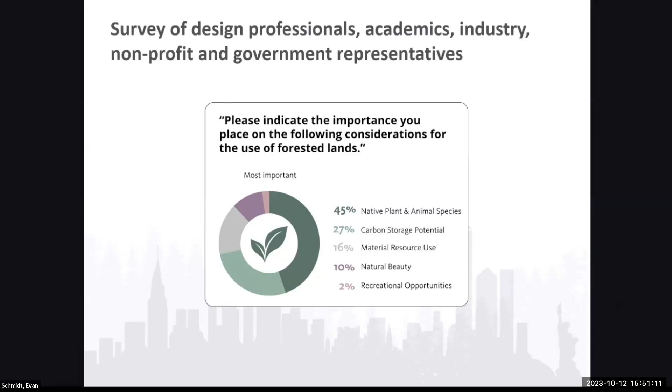We could have speakers from around the world come talk and frame these workshops based on this document. You can find these workshops on our website, buildhealth.uoregon.edu, also on the NetZED Lab website. And the final document, which I'd like to announce is now ready for you to take a look at, it's out there, also on our website. I assume it's going to be on the Tallwood website soon if it isn't already.

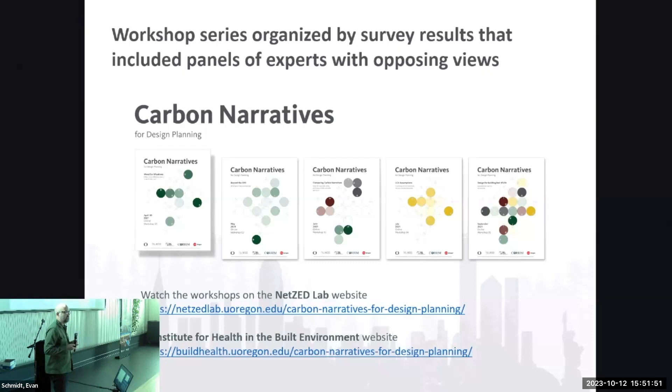So please check it out, we'd love for you to take a look. It's like 100 and some pages, so all the transcripts from the workshops are in there, as well as a breakdown on these different structural materials. It's done in a visual way that we hope architects can appreciate as well as others. It's already been rolled out in classes, so it's really exciting to have this project that Tallwood and the ARS grant funded.

So some important takeaways for this project - like I said, I could go on quite a while, it's a long document, we learned a lot, it was an amazing journey. When we started this journey, we did it along with a lot of you in the room, and you've all been working on this and produced some amazing work based on the lessons we're all learning about LCA and forestry. So this is by no means our work - this is everybody's work that we've compiled based on literature reviews and workshops with experts.

So one of the takeaways is that buildings really are a big source of CO2 emissions, and I think most of us here can recognize that, we're all in the industry. But the global building stock is really burgeoning. We are increasing buildings at a tremendous rate, and it's expected to double by 2060. That's equal to about one New York City amount of floor area every day in terms of built environment expansion. So we have a big role to play as professionals in this industry to help reduce that CO2 emissions from the materials that we select.

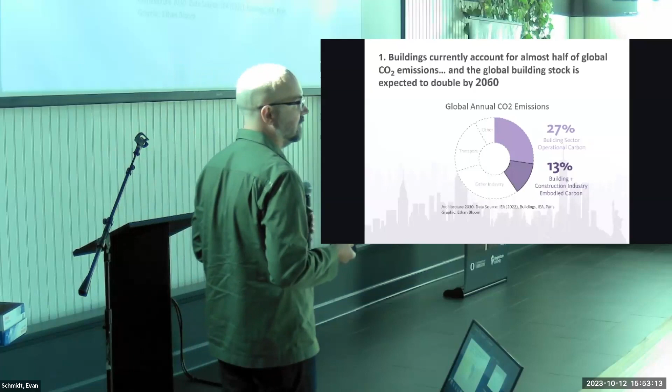The mass timber carbon story, as has been mentioned in presentations earlier today, begins with design and the selection of materials, but also the end of life and material reuse portion of this is really important. That's why there's more effort right now going into that research, because what we do at the end of life with our materials really matters in terms of the carbon story. Designing for disassembly and reuse, and how we get those materials into the market, is still a work in progress in terms of research and certainty. But we hope that with other funded projects, we're going to know more soon. That's an important part of the story.

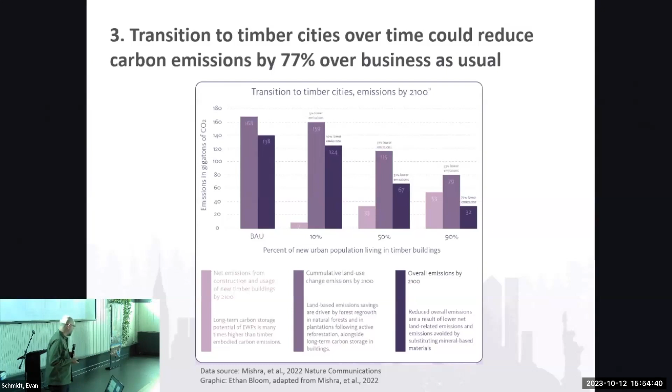Transitioning to timber cities over time could reduce our carbon emissions by about 77% over business as usual, depending on the percentage of wood that we're using. That was a paper that came out in 2022 from Mishra et al., and that was an interesting finding. But of course, it really depends on us managing those forests appropriately, doing good sustainable forestry practices, and protecting diversity hotspots around the world. So there are some caveats to that, but it's a good finding that this can be a good solution for our carbon emissions.

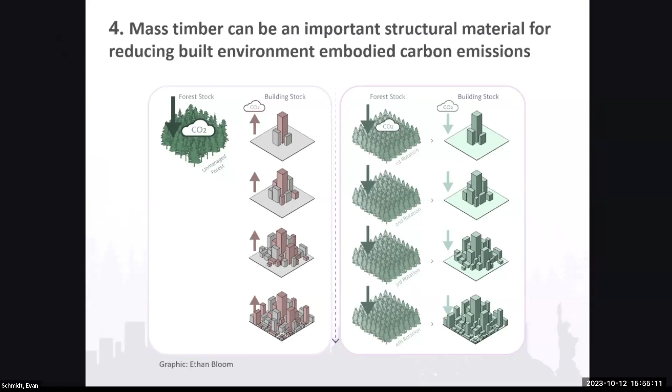This is a graphic - I hope you can see these. I guess they're a little washed out here, but Ethan Bloom did these, and they're beautiful to look at in our document. This is just talking about how mass timber can be important as a structural material for reducing built environment carbon emissions, as we start to move that carbon pool into the built environment, and building durable buildings that last a long time. That's also really an important key to maintaining it in the built environment.

Mass timber can be sustainable, if forest management is sustainable. One of the things that we learned too is just really trying to use the entire harvested stem fiber for long-lived products, not just things like paper that might be short-lived, but really getting the mill waste, for instance, that happens when we make these products, into other products that can be stored in the built environment for much longer periods of time to lock up that carbon.

So that is the project. There's a lot more to it, and this is just an overview, but it's a document that I hope you can all dig into. Maybe with a glass of Pinot Noir, sit down and read it this weekend or something. It's done and it's out there and ready for you to look at.

Another project that we're getting ready to launch - this one was funded this year by ARS, and I'm really excited about it. We don't yet have the contract signed at University of Oregon, so we haven't started, but it's coming very soon - is the infiltration of all wood construction techniques.

As we just talked about, it's important to build our cities more out of timber to get carbon out of the air. And as we want to do that, where do we put more wood fiber? Well, the enclosure is one area which is relatively untapped in this country anyway. In Europe, they've done some more projects with wood in the enclosure, but we really want to start to see projects where mass timber is going into those systems as well.

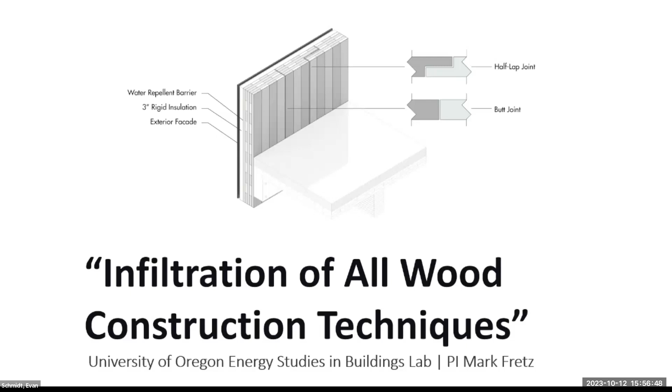We had the opportunity with a Wood Innovations grant to look at that on a beautiful project that's constructed, and do a post-occupancy evaluation of the interior environment with all wood construction. So we looked at a number of things, but in particular, we were interested in the thermal aspects of that enclosure, especially since wood is a fairly good insulating material, and mass timber, the thickness, we suspected could play a pretty good role in being a thermal barrier for the cladding attachments and everything on the exterior. So this project used infrared imaging to look at the enclosure, as well as blower door testing to look at infiltration, and then also imaging during the blower door tests.

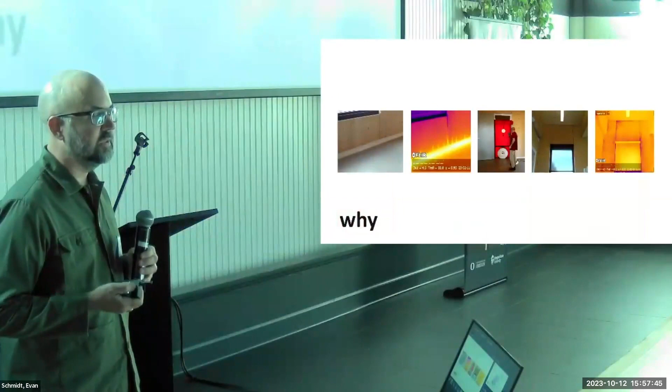One big problem we had when we go out in the field and do these tests is there are all kinds of other variables in the building when you start to pressurize and depressurize them that were not able to allow us to answer the question about how the mass timber panel joints were working for infiltration.

There was a big roll-up door, for instance, and some other offices that couldn't be closed. So we tried to tape off an area where we could assess that. We tried to figure out a way where we could isolate a joint and just test a panel field area, but it's not easy to do.

And so we got some good data from the infrared images that suggested the mass timber was a pretty good thermal barrier, but some of the weaker spots were at the joints for infiltration.

So we suggested that it would be really great to study this in a lab setting and create an assembly where we could specifically isolate joints and look at joint configuration with a duct blaster in a sealed box configuration.

So that's what we plan to do, an 8 by 8 foot field area with several mass timber panel joint configurations, which you probably can't see here, but we're going to be looking at 3-lam CLT as well as 4-inch MPP.

And I know the project we looked at had some thicker wall assemblies. This is because we don't have an overhead crane at the University of Oregon. We have our backs that have to lift this stuff. So they're going to be a little thinner than what we tested.

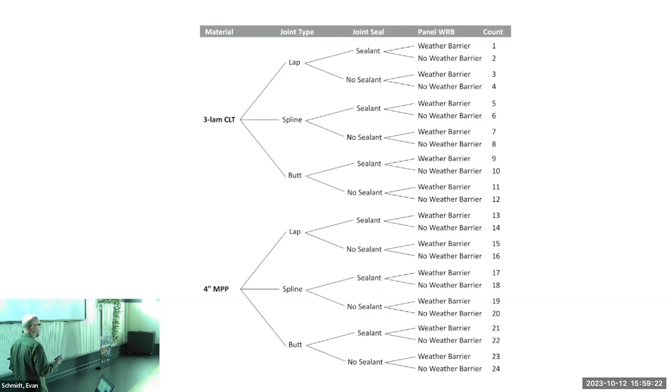But the key is that we're going to be looking at a lap joint, a spline, and a butt joint with and without a sealant or a gasket. We don't know exactly yet what products we're going to use, and with and without a weather barrier. When you add all those up, you get 24 different tests of these things.

So we could start to really get some quantitative data on this. And next year we'll be the ones maybe with a graph coming back here in the design section, which we don't have this year. So like I said, this one is just getting started.

Hopefully very soon this fall, we've got students lined up to work on this. And the students, like Erica mentioned, we hope will one day go out into your firms. I should also mention that Ethan Bloom is now at FFA. So it's great to see the students that worked on these projects go out into the firms and be part of this ecosystem.

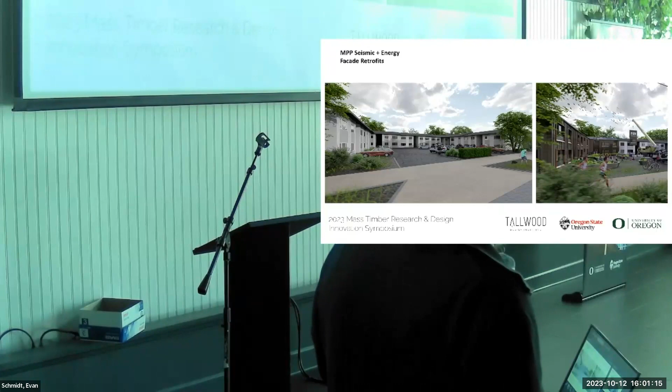Starting with retrofits, you don't have to go too far from here to find a building typology like on the left. Looking at 2- and 3-story multifamily residential pre-1990s construction, pre-seismic and energy codes at that era, and built to the minimum code standard of whenever it was constructed.

And looking at how we can put as much as we can into the facade for those retrofits. We have a lot of existing building stock. A lot of it is aging. Some of that at least needs to be a part of a low carbon, low energy, highly resilient future. And so that's what these projects are about.

Part of that initial project was a small mock-up done at the Emmerson lab. And to get from existing condition to retrofit facade, we looked at some of those details required and fabrication processes.

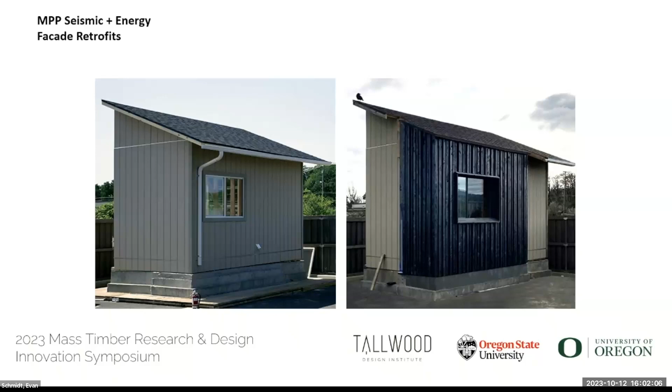One lesson learned in that process is related to scanning. So the concept here is that you would go out, take multiple LiDAR scans of an existing structure, translate that to 3-dimensional models, fabricate your panels, and hopefully they show up on site and they fit.

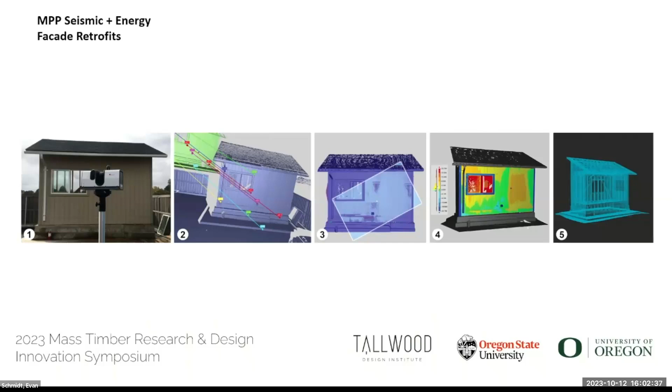Not all point cloud data is created equal, we've found from LiDAR scanners, and the workflow, digital workflow with that data is a critical piece, and we hope to implement that lesson learned and others in these current projects.

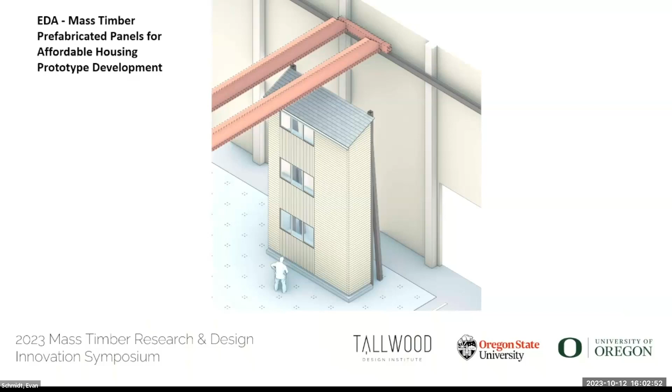So the first one is the evolution of that residential project. This will be built inside at Emmerson, and we are just to the point where that drawing set is about complete, and to put that RFQ out for a contractor who will build both the existing and fabricate and install the retrofit.

The interest here is really to layer on the reality of constructability and cost aspects for the project.

Similar to the first small mock-up, this is a retrofit foundation tied back to the existing slab if it was a slab at grade, and that's where those seismic forces are resolved. In the middle, you can only see the transfer joists that tie the existing structure at each floor diaphragm and roof diaphragm into vertically oriented, vertically spanning MPP panels in this case.

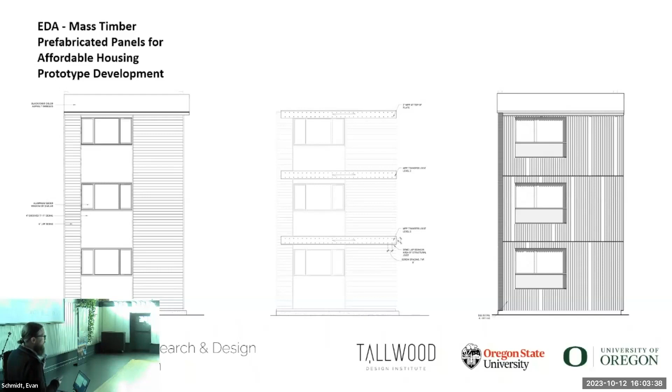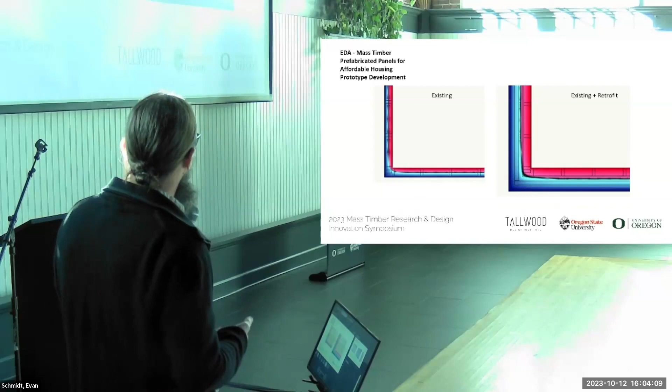We've done a lot of thermal and moisture modeling. This is temperature only, an idealized case where temperature is held constant: warm inside the building and cold outside. The simulation runs until the entire wall assembly reaches steady state. You can see that temperature point right down the middle of our stud bay on the left. By adding the MPP panel with inboard and outboard wood fiber insulation, we're able to move that transition temperature out of the existing structure.

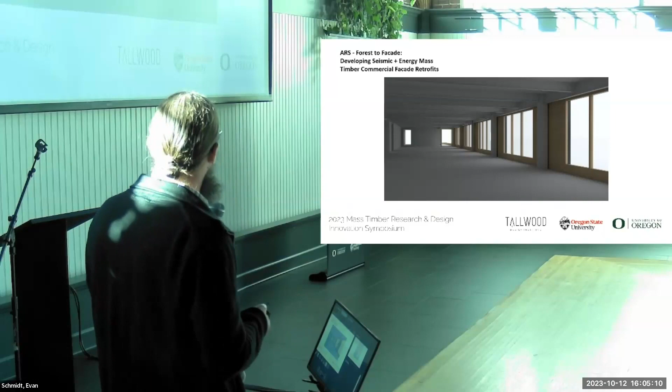On the commercial side, this is an ARS funded project. We partnered from the get-go with William Silva and Swinerton, looking at a case study project, not a mock-up, finding a Pacific Northwest commercial office building that has been recently seismically retrofitted, though not with MPP energy and seismic panels, but with those BRBs we've been hearing a lot about earlier. This project is also a replacement facade project, not leaving the existing facade in place. So we have opportunities related to exposing mass timber on the interior and raising head heights of windows to get daylight further back into the space. Stay tuned for more on this project.

Moving to mycelium, there is growing research for thermal insulation of biocomposite products. Our interest here is in acoustic applications, using it in a floor ceiling assembly, for example. The mycelium is the binder, potentially replacing adhesives and other petroleum-based products, and the substrate can be wood waste from lumber mills or mass timber production. That's the direction we're going with this one.

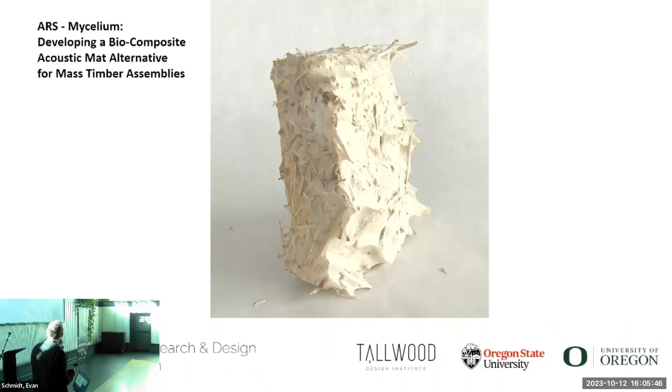Just getting started with it this fall, perfecting our recipe and procedure for making and growing this mycelium. There's an inoculation step with the mycelium, moisture content, and an incubation period, and to stop that growth, there's heat and drying at the end.

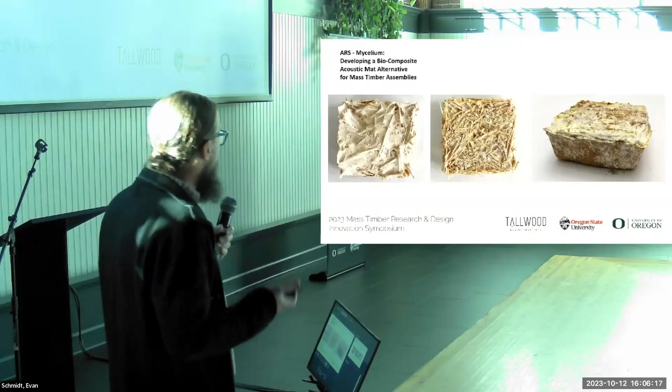We hope to investigate both the material properties of these acoustic panels at a larger scale. We're going to test them for acoustic properties in our microacoustic chamber, hopefully finding an acoustic performing alternative that's a biocomposite.

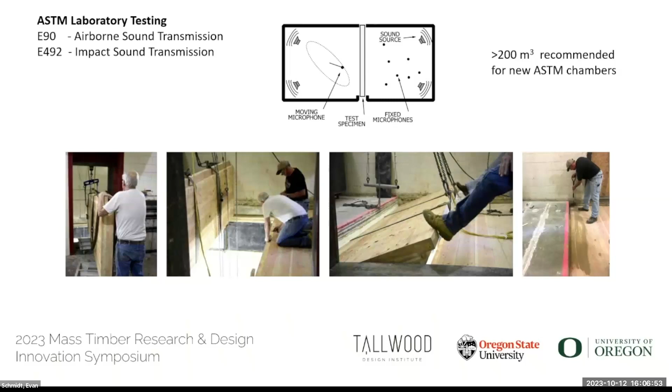Why a microacoustic chamber? First, there's the ASTM test facility for full-scale testing of mass timber assemblies. The assembly and test sample need to be quite large, forming the partition between two large rooms, the source room and the receiving room. Our microacoustic chamber is much smaller, and it's just the receiving room. That means we can't accurately measure those long wavelength, low frequency sounds required of an ASTM test. However, we can do lots of tests quickly and in a cost and material efficient way.

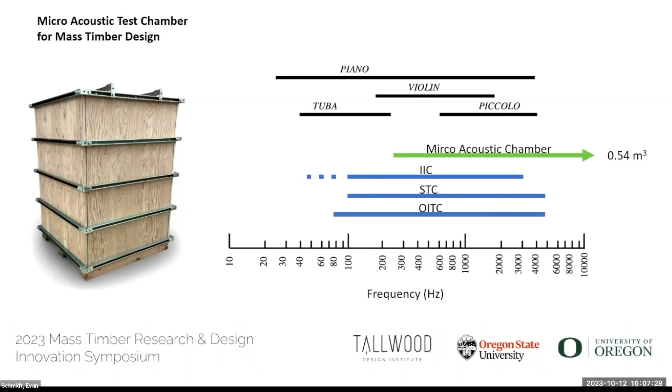This is really intended to provide comparative test results for development of materials like mycelium panels. Our microacoustic chamber has an inner and outer box with 6 inches of sand as our primary acoustic dampener between them. The mass is good, the interstitial air spaces are good, and the test sample sits on top of that box.

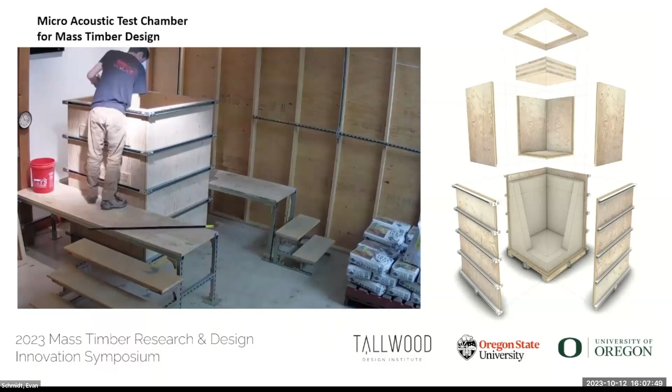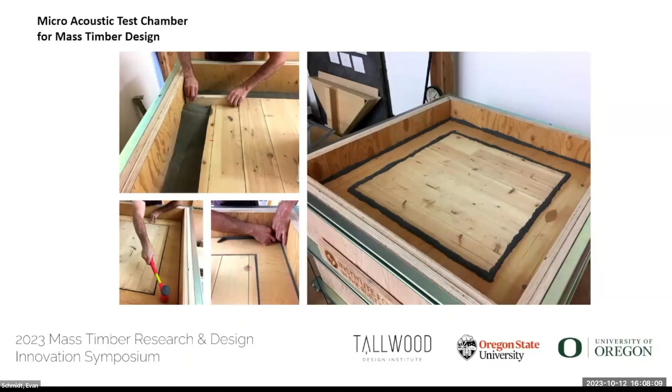We're using our field testing equipment: an omnidirectional speaker and our tapping machine as sound source, with the lab itself acting as our source room. The test sample is also surrounded by sand as a primary sound isolator. We have what we call a plywood donut that goes on top, and all of those air gaps are sealed with putty. This is all time-intensive, but at this scale, it's much quicker.

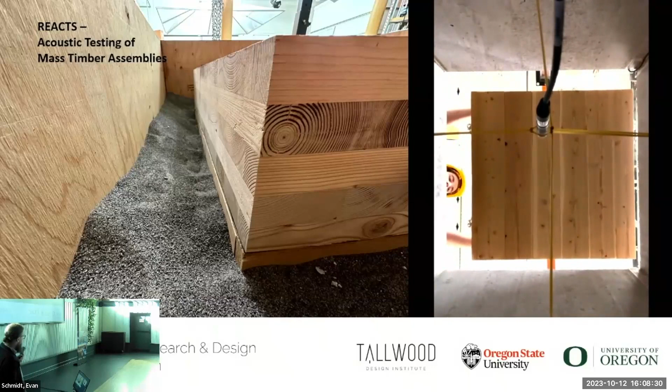We've most recently used this microacoustic chamber for REACTS consortium testing, and we've finished the first phase of that testing based around 5-lam CLT and interlayers and acoustic treatments that can be applied to that. Here's some time lapse of that.

We now have a gantry crane in our Portland lab for lifting CLT samples and concrete topping slabs. Each assembly is installed with the sand and the putty, and then tested both for airborne and impact sound.

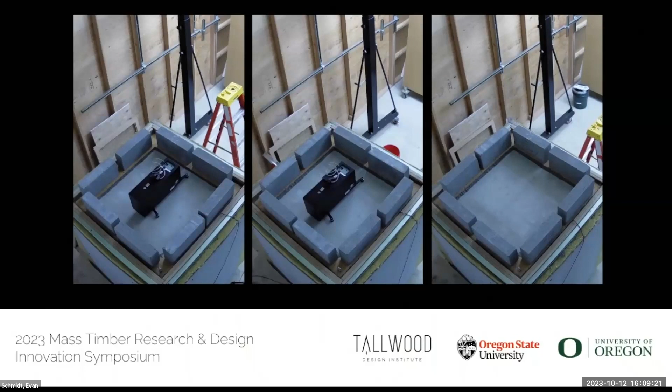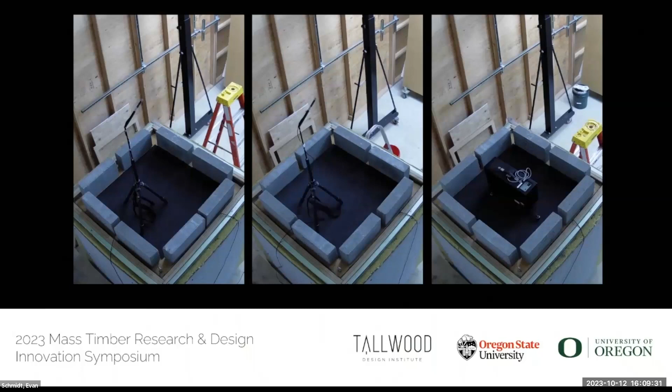One thing you'll see here is we're also testing it with carpet and carpet plus carpet pad, and those were easy to do, giving us two more data points. Unfortunately, nobody likes it, but carpet is a great acoustic treatment, specifically for impact sound.

So this is phase 1. The next phase will also use the microacoustic chamber and some lessons learned from this first phase, picking winners from the material categories. Then ultimately a smaller set of full-scale tests will be developed and conducted at an ASTM facility. So thanks.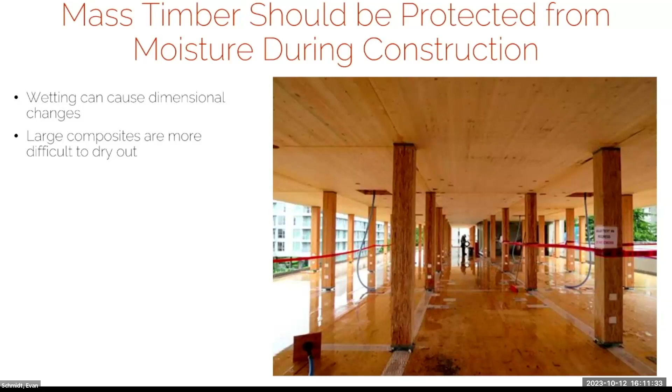This project is born out of the need to protect mass timber from moisture. One area where this is particularly important is during construction. This photo, courtesy of Jeff Morrell during the construction of Peavy Hall at Oregon State University, illustrates that you can get quite a lot of water flooding into floor assemblies during construction. CLT and other mass timber products are large, so they're more difficult to dry out once they get wet, and that can cause issues for decay, durability, and the like.

So there are several solutions out there that are increasingly being utilized: tarping and putting up moisture barriers during construction, or pre-installed vapor barriers or membranes on mass timber panels in the factory to help prevent this wetting during construction, are a couple of options.

But another option that's out there is coating — actually coating the surface of mass timber to decrease the wettability of the panels and reduce moisture intrusion.

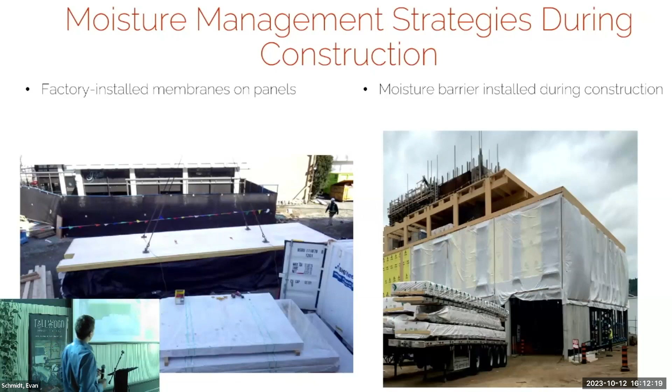Some of the work done by University of Oregon shows that the microbiome on the surface of mass timber panels is potentially important in modulating the health of building inhabitants, and that could be one of the factors that contributes to the benefit we get from biophilic design.

There's also some prior literature showing that coatings on CLT, in particular for this study, can interfere with some of the microorganisms that can potentially grow on mass timber. This study particularly looked at defacing molds, and some of the coatings actually reduced mold growth, which is a good thing, but that's an indicator that there may be some negative interactions with other microorganisms that grow naturally on wood surfaces that can be beneficial.

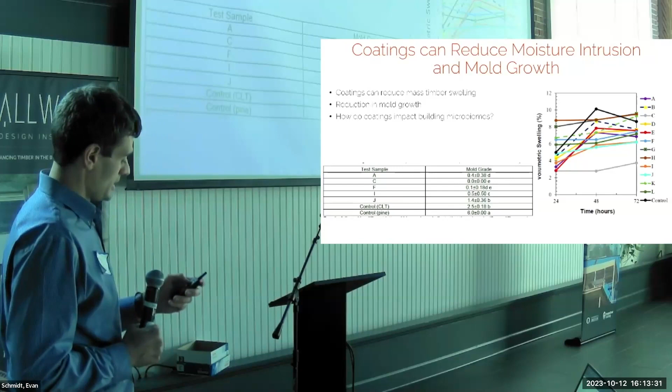So that's one of the things we partnered with University of Oregon to take a look at with this study. University of Oregon is doing the work to essentially assess the impact of several different coatings on the composition of microbes or microbial communities on CLT surfaces.

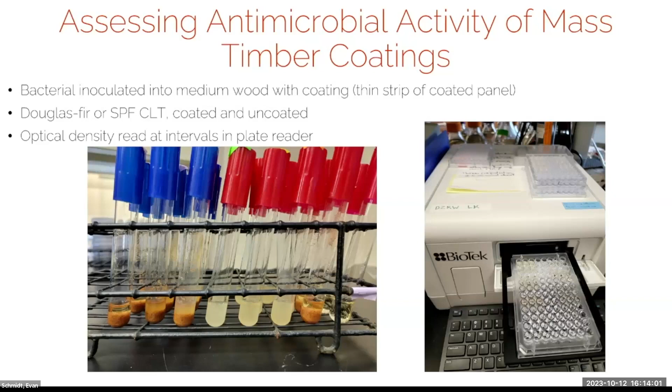And we got some of the same coated pieces of mass timber and assessed the coatings for antimicrobial activity to see if we're doing any harm by adding a coating, increasing or decreasing the likelihood of beneficial microorganisms growing on the surfaces. We did this by taking some of these, which ended up being CLT rounds.

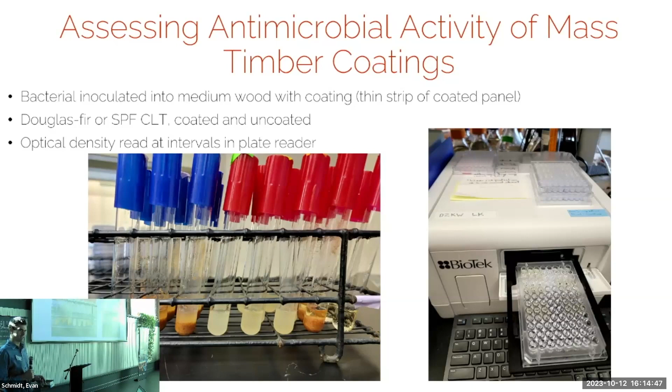Some of them were coated, some were not, and then we shaved off the very outer surface, ground it up, and exposed bacterial cultures to this in test tubes as pictured on the left. Then we incubated them on a shaker and measured the growth curve of the bacteria to see how the wood plus coating interfere with bacterial growth, if at all.

So what we found is we looked at 3 different bacteria, one gram positive and two gram negative. Bacillus subtilis is our gram positive, E. coli and Pseudomonas putida are our gram negatives. We've got a variety of different coatings here, 3 different coatings, and then we also took the layer of wood underneath the coatings just to see what the effect of the wood itself is.

And what we found is that for Bacillus subtilis and E.

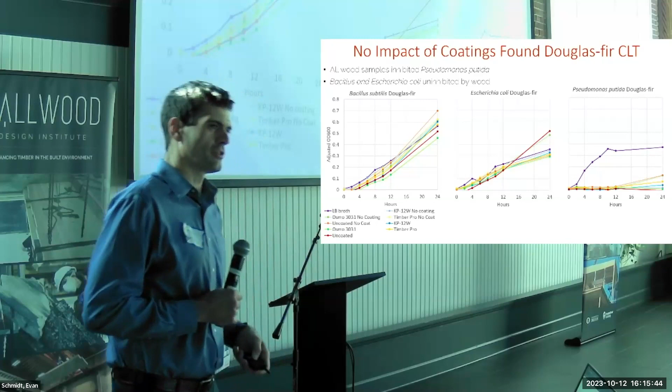With E. coli on coated Douglas fir CLT, we don't see any impact of the coatings or the wood, but we did see an impact on one of our bacterial species that we tested. Everything except for the wood-free control did not grow very well. This indicates to us that the coatings really aren't causing an issue, but the wood itself has a little bit of antimicrobial activity for that specific bacteria.

This is also supportive of some of the work that U of O has done in the past, in that wood surfaces kind of have the ability to modulate their own microflora. So you can say this one type of bacteria is not going to grow very well on wood surfaces, and other bacteria may grow well on wood surfaces.

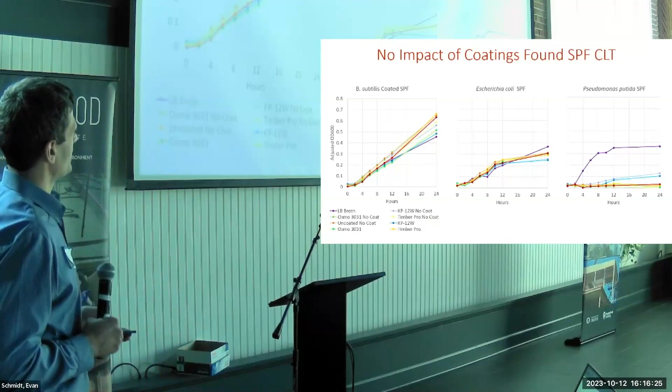We also had SPF CLT in the study, very similar patterns, maybe a little bit less antimicrobial activity for our Pseudomonas as compared to the Douglas fir CLT. But again, not a whole lot going on for the coatings. So again, at least with our methodologies here, we did not see any antimicrobial impacts of the different coatings. The wood does have some antimicrobial activity against certain bacteria.

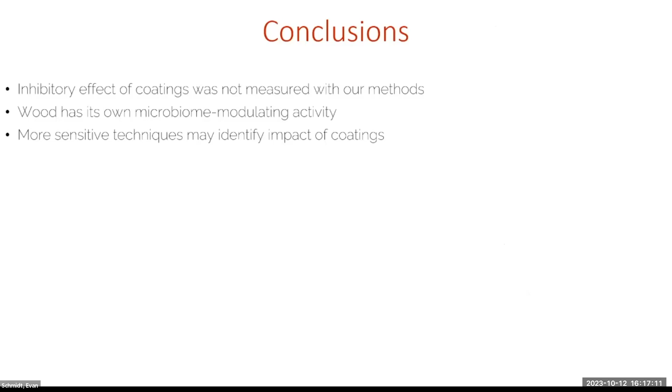One caveat to this data is that our assay may not be sensitive enough to pick up on these small changes. For example, we are trying to get as much of the coating in these microcosms as possible, but the vast majority of the material that the bacteria are exposed to is actually the wood. So that could just be a factor we won't be able to detect in this specific assay.

So U of O is working on getting some data on what the actual composition of the microbial communities are on these differentially coated surfaces, and that may tell us a different story than we've found with our assay.

With that, I would like to thank TDI, USDA ARS, and collaborators at U of O. And thanks, I'll take any questions.

Yep. Was that good timing? Perfect. Yeah, I think we'll have time for questions at the end. Just looking at how we're going, we should be good. So I hope you hold those. We still have some great presentations. So speaking of which, my colleague Judith Sheine is going to talk about two of the projects that she mentioned earlier, I guess, at least one of which.

Green button. Yeah, thank you.

So I'm now speaking as professor of architecture from the University of Oregon, still part of TDI. I'm going to talk about a couple of projects, one of which you should probably already be familiar with. I apologize because I have a couple of slides later, and I think none of these slides are going to be visible given the light situation, but I'll talk through them.

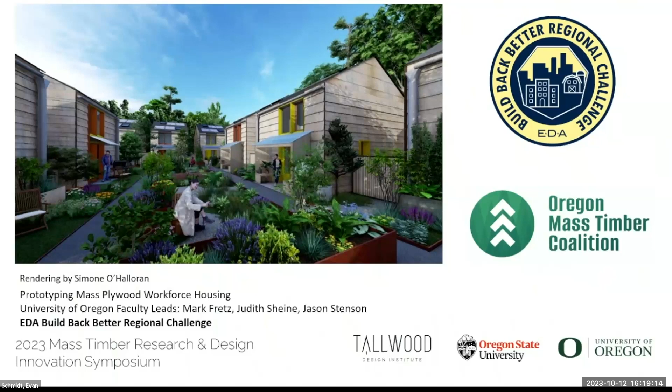I think everybody in this audience is aware that we've been working for a while on developing a prototype for mass plywood housing. Specifically, the prototype is for little two-story ADUs, accessory dwelling units, or for cottage clusters, with the idea that real estate is one of the most expensive pieces of housing.

Oregon has just changed zoning laws—well, they haven't changed the zoning laws. What they've done is gotten rid of single family zoning in any city over a population of 10,000, and they're asking cities to change their zoning laws to allow much denser development.

So we decided to look at this specific type and see if we could make it affordable, meaning that we don't expect it to be less expensive than light wood frame, but we're hoping it can be equivalent with prefabrication and have all the co-benefits we talked about with the Oregon Mass Timber Coalition and the EDA: encouraging selective harvesting, sustainable forest management, wildfire reduction, more jobs in rural communities, manufacturing, etc. We would create something that is actually a better product—more thermally resilient, more seismically resilient, and more fire resistant than light wood frame.

As we said, and I've already shown you this slide—this will be the last of my visible slides, I'm pretty sure—we went with a panelized approach, so the idea is that it could be done in a factory, but we're also designing it at a small enough scale that a contractor could just get the panels pre-cut at Freres and then do everything else essentially in a warehouse without very fancy tools and equipment.

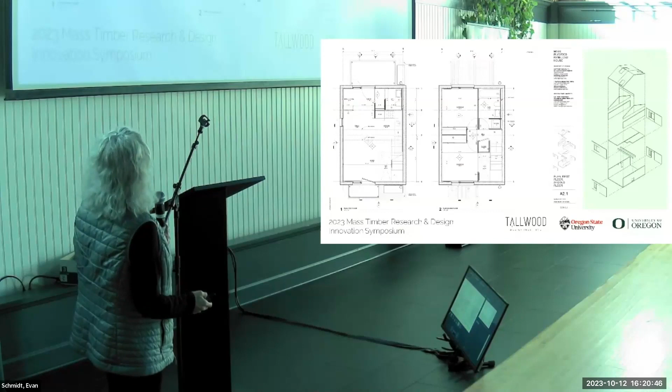I think everybody knows that expression that you can either do things fast or cheap. We are not doing this fast, I think would be fair to say. Mark Fretz and Jason Stenson have been working on this for like 3 years now. Why does it take 3 years to design a very small house, especially when one of my specializations is supposed to be housing? Well, it's because nothing about it is like a lightwood frame house.

Everything is exposed, including all the services. We're trying to figure out how we can actually make sure that jurisdictions and building officials will accept this, because nothing about this is in anybody's code that you can have a 2-story building out of 2 and 3-inch mass plywood panels. So it's taken us a while to figure out how to do this.

We hope to actually really start construction on the first prototype inside Emmerson. We're very excited that we'll be doing this inside rather than outside. We hope to be starting construction at least by the end of the fall term. We tend to measure things in quarter terms - fall term, and be well underway by winter. We're doing 2 prototypes, and again, it's a tiny little 2-bedroom, under 800 square feet.

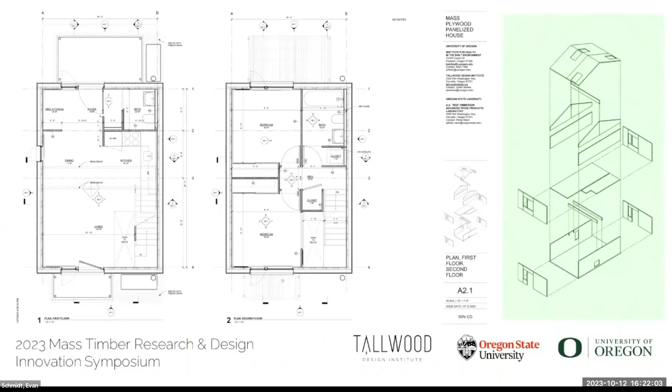2 bedrooms on the upper floor, bathroom and a half. These are the exciting elevations. We've been working on, obviously, what the assembly for it would be. We're waiting for TimberHP to come out with their hardboard wood fiber insulation.

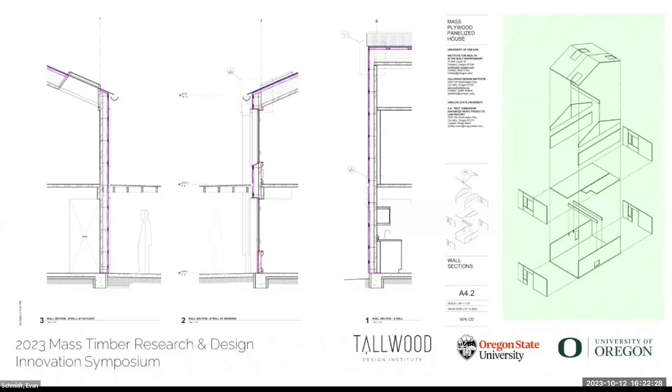They won't have it in time for our first prototype, but this prototype we're going to be doing structural testing and constructability testing. Once we think we know what we're doing, we're going to have a second prototype, which we're actually going to construct outside. We're going to have a contractor do that to dial in on costs.

We think that the wood fiber insulation will be ready, produced in the US by then, which we want to use. Outside we'll be doing acoustic, thermal, probably indoor air quality tests, and encouraging our TDI staff to hang out in there and have meetings so they can generate some moisture and germs and all kinds of stuff that we can then measure.

This is just some details we've been working on. I really put this in to show that we've made progress from last year. That's really the point of these images.

We're particularly dialing in on exactly which panels we're using. We've laid all these out on 3-inch panels and 2-inch panels. We're trying to waste as little as possible. We're kind of entertained when we realized that our framing plan had virtually no framing in it - it's basically just panels.

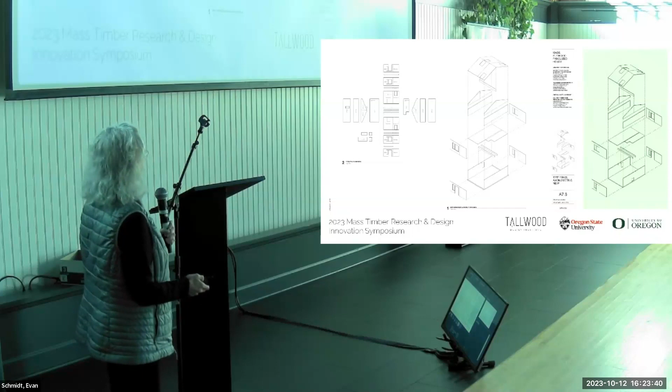As you can see, the panels are all specified. We have actually layouts of files that we're about to give to Mark Gehrig, who is sitting in the back, first to have him look over and make sure that they make sense, and then eventually to fabricate and put on the floor. We're excited that we've gotten this far.

I know there's been a huge amount of interest in this project, and we hope that once we get something going, we're going to put some things on our website where people can sign up for tours. We hope we have a successful project, meaning that we hope that it is actually affordable, it can compete with lightwood frame, and we can get some developers to actually build it. All the information will be open source because, of course, it's funded publicly, mostly by this EDA grant.

So I thought that was the last slide, but this is the last slide in this, again just showing all the panels that we're using and the cuts that we're making.

And get another one. I'm trying to get the next one up, which doesn't seem to be coming, which is the reuse one. I seem to be stuck again. No, went way too far. Can we go back several?

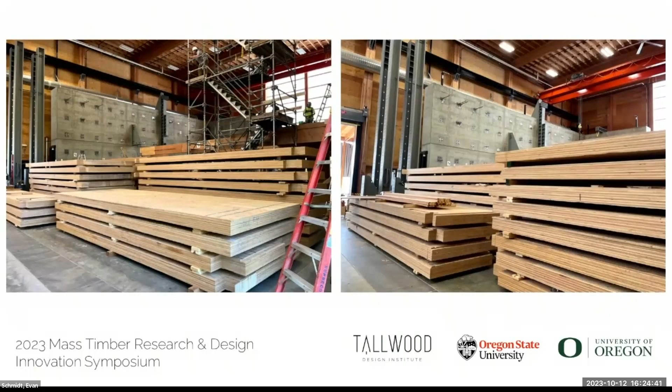I think we're good. Okay, so this is a completely different project. This is the reuse project. And I think the last time we did this a year ago, you saw the Ellie project in about four different presentations, which you're also going to see today.

As you know, this was a project to test a number of structural issues. I was interested in seeing what we could do with it when it was deconstructed. It seemed a little bit crazy to me that this stuff would go to landfill and that we could possibly find a way to reuse all the parts. I think the LCA is showing that landfill is better only because the data in the LCA is based on lightwood frame construction. It has absolutely nothing to do with reuse of mass timber.

So this is not typical reuse. Obviously, this is not a real building. It's a test, but I still thought that it would be great to find a way to reuse it.

So one of my MS Master of Science students last year, Amanda Stanton, did a kind of analysis of what could be left over after all the really big steel connections were cut off, and what would be left of the 7 1/4 inch mass plywood decking, which Andre projected would be undamaged for the most part and could be reused in something. She also cataloged all the steel pieces as well.

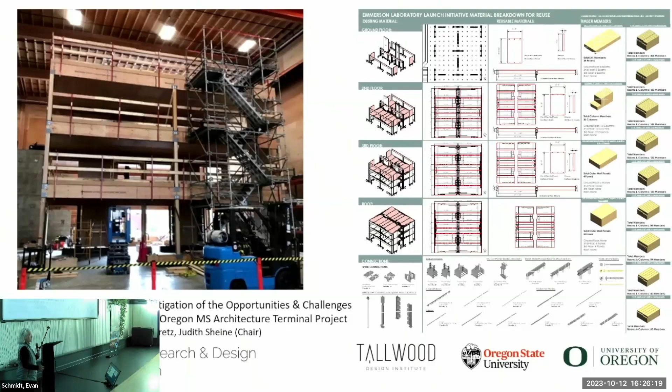So the next step was to find somebody who would actually use the stuff in some way. I'm looking at Jonathan Heppner, who's in the audience - I talked to Lever because they're willing to do all sorts of crazy things. And we started talking about what they might do.

So it turns out there is a project for the University of Oregon, which is now slowly moving into the former Concordia campus. Lever is renovating a former theater there into what will be the architecture department for U of O. So we discovered that they were interested in maybe using some of the panels from the LLI.

Now, we could not use them in a structural use, as Maria Paula has talked about, as Andre pointed out to me. The issue is there's no recertification process yet for used mass timber panels. Not only that, but we had a kind of fantasy as architects that you could just cut these up and turn them into columns and beams, but that doesn't really make sense.

When Freres makes them out of columns and beams, they know exactly where all the seams are, and when you just cut them up, you don't. So there's another of limitations in that. But nevertheless, we did manage to find some non-structural uses for them.

Here is an image of the LLI coming down and creating giant piles of 7 1/4 inch MPP at the alley, and also big piles of steel connections, some of which have actually been used by others, which we're kind of very excited about.

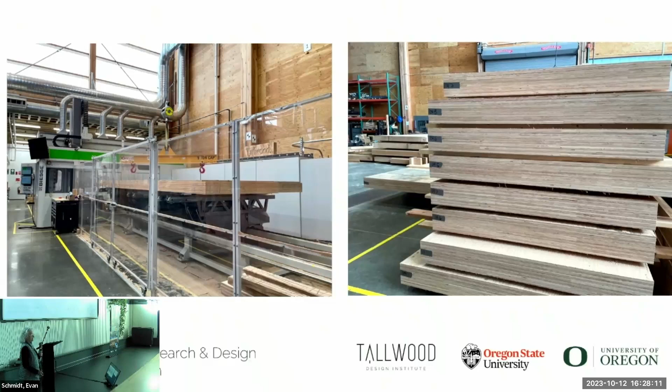And then Mark Gehrig has been working out a protocol for modeling and cutting these things up on our CNC machine, on our Biesse. You can see we have stacks of these that are cut and fabricated and labeled. Eventually they're going to look like this.

Even though, as I pointed out, I think this looks a little nicer than our very used MPP is going to look - it's going to have stamps and a few holes on it in places where we took out straps. But still, it's going into an architecture studio, so we're very excited about it. It's going in to define the low walls around the studio spaces, and also to define these volumes that will be the conference rooms.

So we're thinking of this as a case study of all the things you can do, the things you can't do, the limitations, especially the structural ones. We hope to be able to, when this process is done, disseminate it and publish it on our website. Thank you.

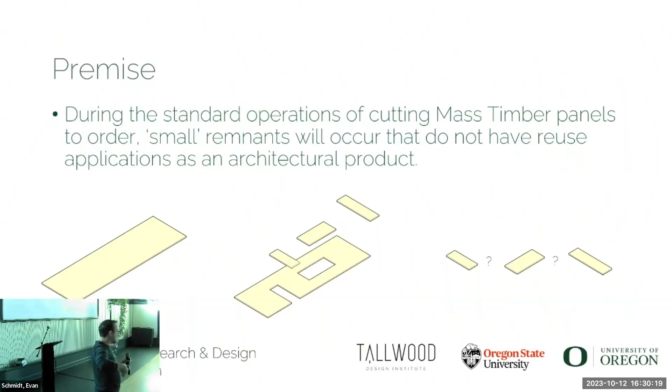We had a premise coming in, not as people involved in mass timber, that those panels, in the processing for architectural jobs, are generating cutouts, panel ends, trims, and nesting. Through various interviews, we found that to mostly be true.

Those scraps were actually most commonly either going into cogen, getting chipped up and turned into energy, going into landfill, or going into long-term storage with this indeterminate 'we might use that someday' mindset.

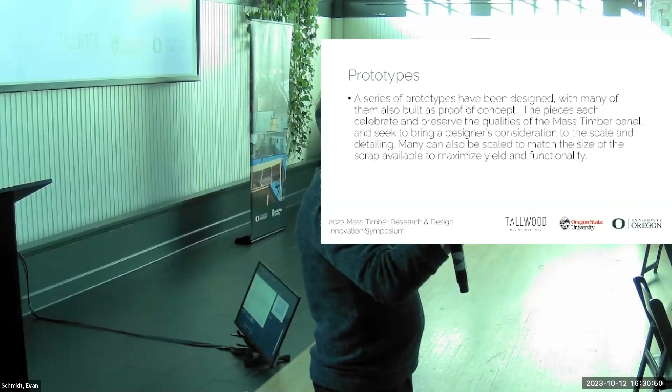So what we are proposing is a series of prototypes, ideally made at the factories as they're processing those panels. This whole idea is an open source platform: we design furniture, we prototype them once as a proof of concept, and then we've talked to panel producers to see if there's something we might be able to work into their process, both to help the sustainability story and the material circularity.

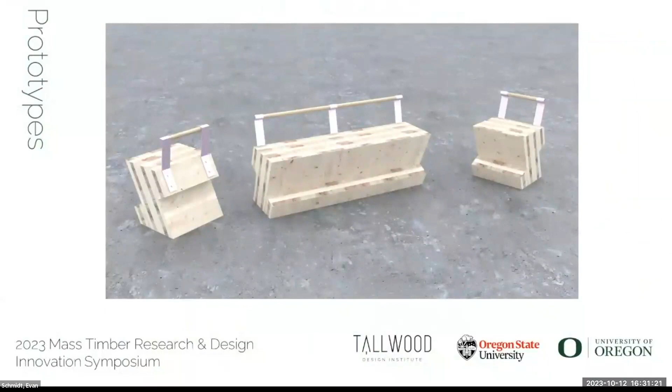If you've been coming to these symposiums the past few years, you've seen some of our work, but I'm going to show you two of our newest ones. This also illustrates our evolution of understanding how the CNC processes work with panels. The first one is what we call the suitcase.

Some early renderings. What's cool about this is it can all be cut with a circular blade on the panel CNC, no tool changes. You can make this modular from an 18-inch individual seat all the way up to a 40-foot long bench if you really wanted to.

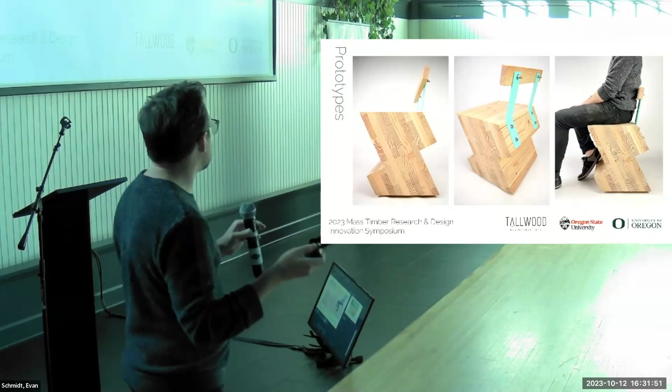With some pretty simple, not off-the-shelf, but very easy to make steel pieces, you can make this seat. We've made that 18-inch version, and now we've also made a 5-foot version that Phil actually helped us cut out. That got installed at the UO Fuller Land Lab for a couple weeks as part of an exhibition.

It's now got a semi-permanent home at the Oregon State campus. We're actually doing that to also see how it weathers in outdoor environments, to see if these are assemblies that can be durable for a long-term period.

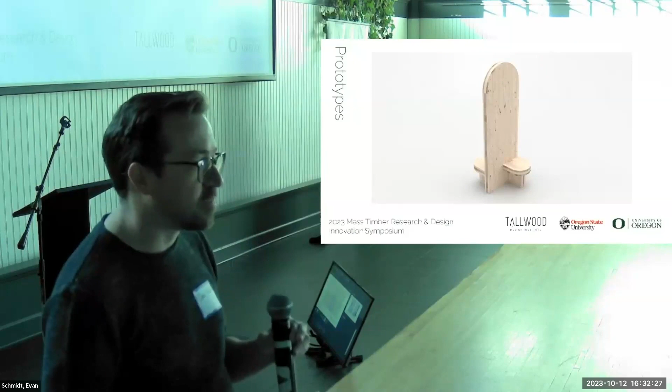Another one that we just assembled is something we've dubbed the tete-a-tete. I work at the interior scale, former cabinet maker, former furniture maker, or I suppose current furniture maker. The tete-a-tete is actually a historical form type, also known as a gossip chair.

Where people in high society could sit together and basically gossip without looking at each other, just throwing comments over your shoulder. So this one we've got parts for two.

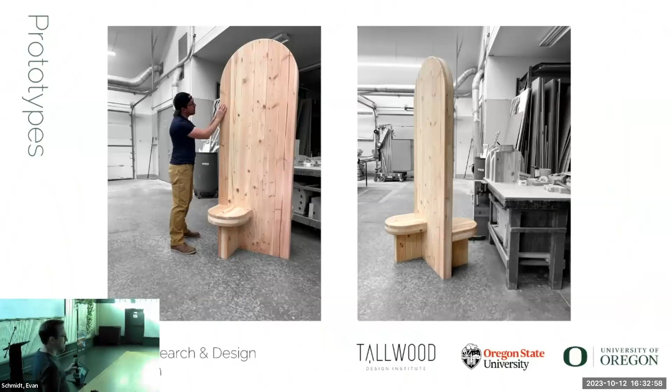We've put one together, and now we're exploring where we might actually do an installation on the UO campus. Particularly for students, you might not want to share a small piece of public furniture with someone, but this one gives you your own private realm.

One person can sit on one side. If you want to talk smack about someone, you still can. Or if you want to have your own world, you're on your own side.

I thought I would throw in a few that we've already presented to this audience before. The squall here on the left is actually a stack lamination of 3-ply CLT, which we milled using the KUKA robotic arm at the Emerson lab.

On the right-hand side is one that's still kind of in the wings: the facet table, which works off of this 15-degree bevel.

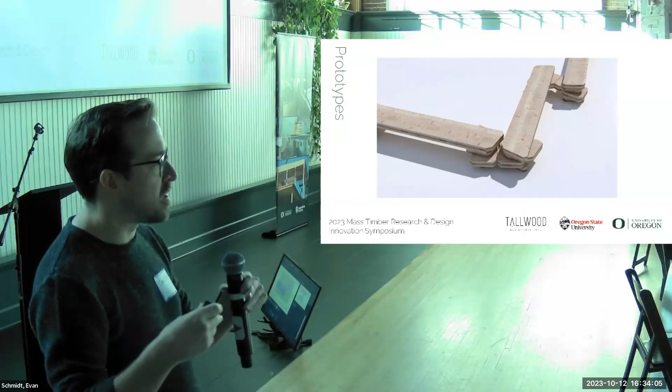The Mesa bench is again a modular piece that's also scalable. This could be a standalone, or if you produce them in multiples, they can go together in different arrangements: a linear arrangement, a 90-degree arrangement, a 120-degree arrangement. It actually turns into really effective public furniture that complements the scale of mass timber material.

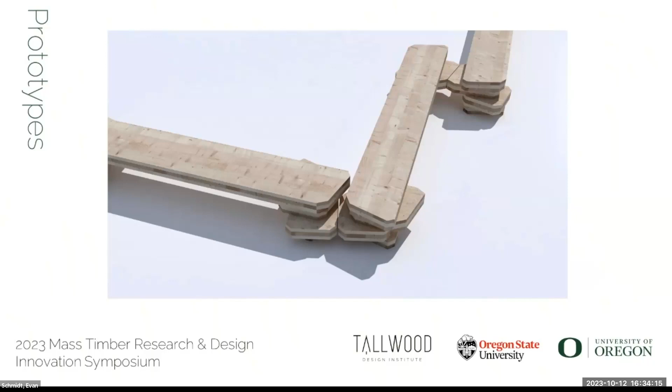And then we've got the Torii bench. For the Torii, we explored this idea of partnering with a manufacturer. DR Johnson, Levi helped us actually make and build 2 of these. They made them in-house and constructed them in-house.

The Torii just worked off of this pretty simple Japanese joinery style, and again, something that can be scalable.

So we made a 6-foot bench, but again, this could be a 12-foot bench. For the weight of a human, you're not going to get massive deflection over a few people sitting on a bench. So we were just kind of curious to see, in exploring these prototypes, what could actually go into a production process.

It's been pretty well received. We've actually shown it in Canada, in Norway, and multiple times in the US. So we've gotten some good traction and some good interest, both in the engineers' realm as well as the public realm.

And really what we're looking for now is getting those connections to panel manufacturers. So particularly in this audience, if you know any sustainability engineers or plant managers that are looking to optimize their processes, or perhaps plant managers that are sick of storing mass timber everywhere, we would love to talk to some of those individuals to see if there would be an opportunity to share those files.

They could explore in their own setups how to incorporate that into their mill line, and then see if those pieces could actually become either value adds, independent pieces that they sell themselves, or things that you get to basically give the clients because they've already purchased the panel.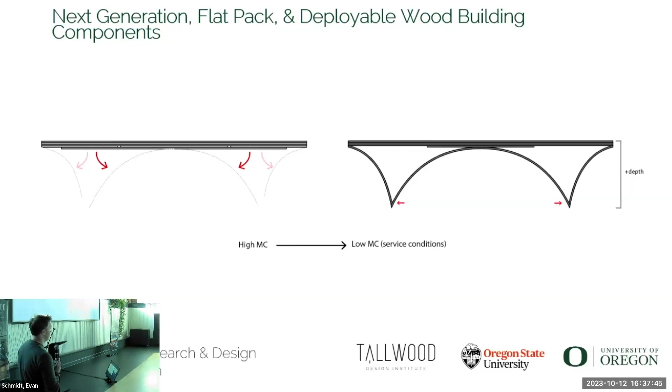As I said, this is based off of some slightly larger scale work that I did already at the University of Stuttgart in my PhD and postdoc, where we used a similar process which uses the hygromorphic properties of wood to shape really large scale lamellas for CLT construction. That was then implemented in the Urbach Tower project at full, partially certified, load-bearing scale.

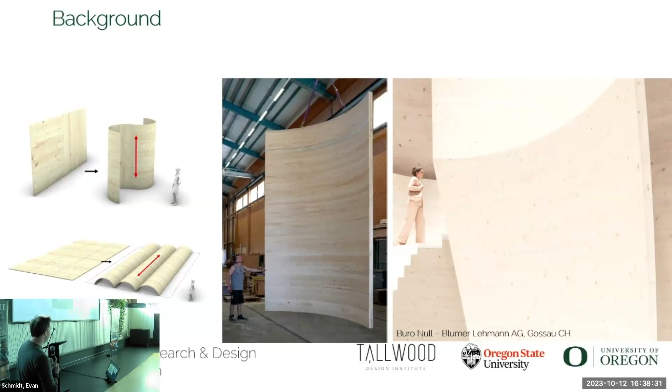And that's a project that we continue now with Blumer Lehmann AG in Gossau, Switzerland, to be implemented for full certification for producing large-scale curved CLT through a shaping process that happens in the factory. We've also recently completed another project which uses this deployability idea, again at a really large scale, called Hygro Shell.

This is now on display in Chicago at the Architecture Biennale, where we have these flat panels, which you can see here start out flat and vertical, and then over a couple of days shape out to form this curved shell.

A similar concept we applied already to furniture. This is the easiest to understand: you get your IKEA furniture as a flat sheet, as you see here, and then over a couple of nights it shapes out into the full form.

So the question, or the start for the current project, is to look at how we might do that using slightly different material, more precisely 1/8-inch Douglas fir peeled veneer, which would hopefully come from Freres. We haven't used this in this sort of self-shaping exercise before, but it's particularly well suited because it comes already wet, so we wouldn't need to dry it.

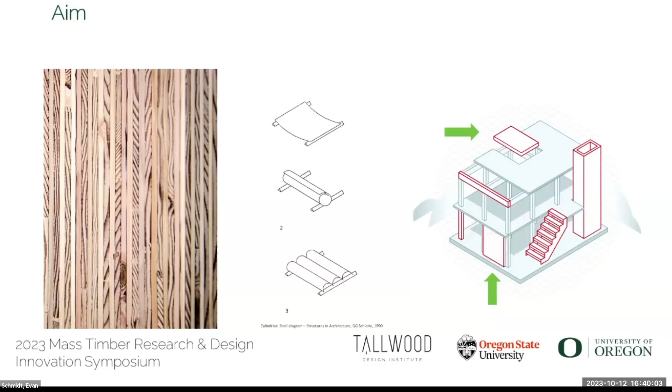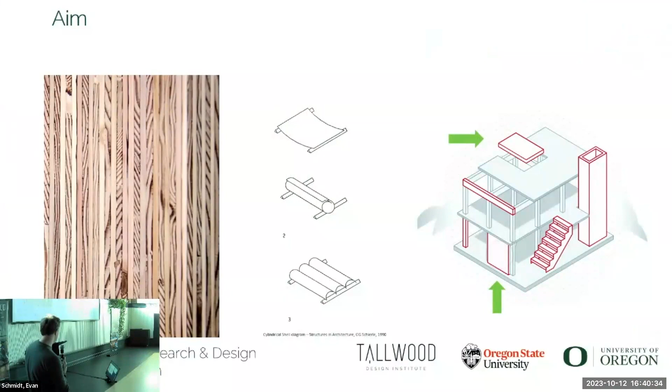And it also is continuously tangentially cut or peeled, which means it has an incredibly high expansion and shrinking and swelling coefficient, which is ideal for what we want to do. Then we will look at how we can use that to generate cylindrical forms, which are valuable structurally. And then we'll look at how we can apply it on a mass timber basis, looking at flat floor or wall panels that would have these curved structural elements popping out of them.

So this explains, we haven't started the project yet, but this explains how we're going to go about it. We can use relatively standard veneers, and my team at UO will calculate and figure out the buildups we need to glue up specifically to generate this self-shaping behavior. We're also looking at how to utilize the curvature in those ribs or extra features structurally, with the goal of reducing the number of lamellas needed in a panel by using the geometry of these curved elements to add structure.

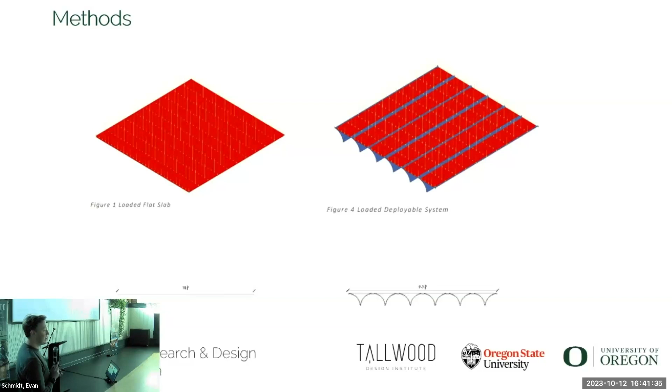And there's also a lot of other interesting architectural uses, like if these curved surfaces can benefit acoustics, or if they could be used for mechanical services that would come after that. So these are the expected results. We're going to build a full-scale prototype by the end of it. And there's a couple of really interesting aspects in the self-shaping realm that we'll get from this by using the veneer, which seems really promising.

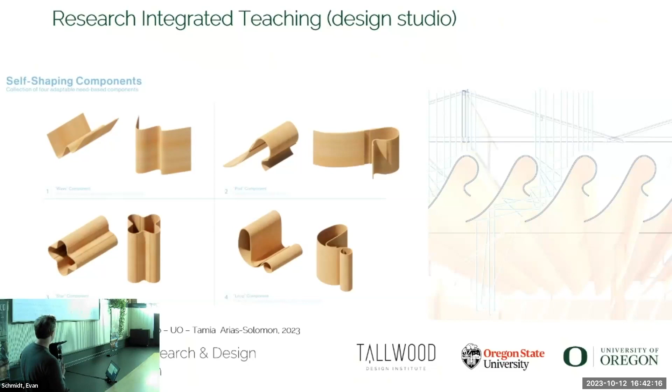I also wanted to highlight that I don't show the students here, but we already integrate this through research-driven teaching in the design studio environment at UO through a couple of projects that look at how we can use curvature and thin elements for ultralight construction, which doesn't consider fire constraints, but is interesting because it uses so little material compared to these standard mass ply panels.

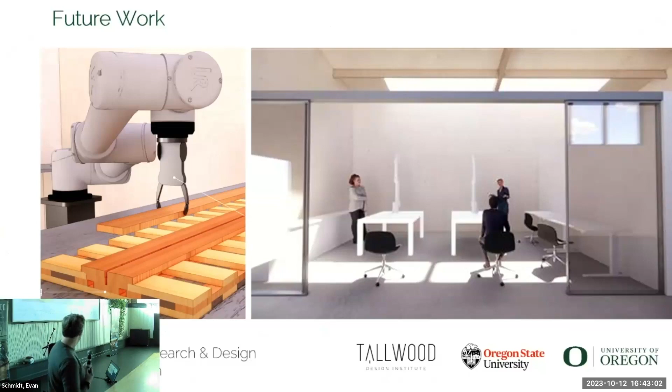Part of this, we're also setting up a new physical laboratory at UO, which will be integrated with architecture students and a couple of friendly robots, in order to push and advance the digital fabrication aspects in relation to timber with architecture and design students. So, thanks.

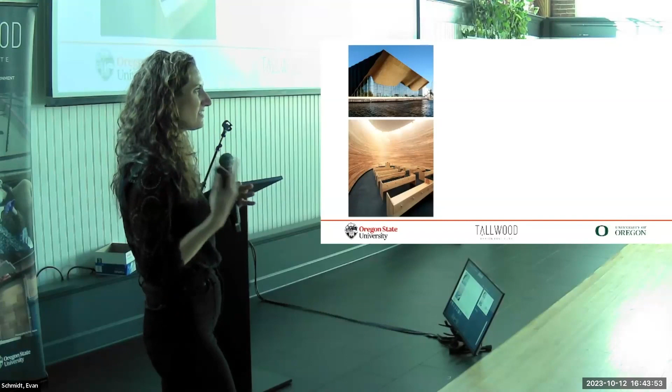As the architects continuously update their curved surfaces, we can, as structural engineers, continuously analyze them without creating brand new models every single time. So what this is developing is a framework to couple the architectural parametric modeling with structural finite element software, so we can actually analyze these curved surfaces.

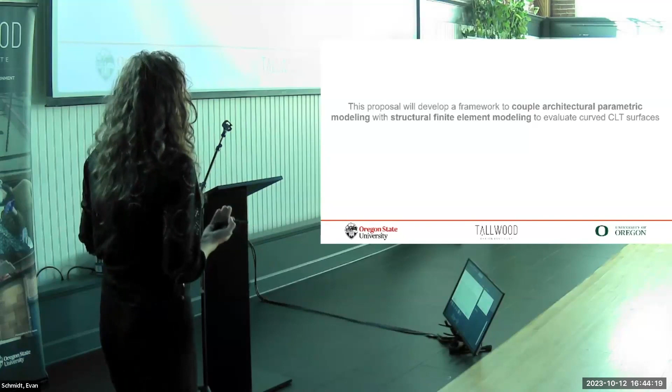Since we're both, I guess I'm not new anymore, but newer faculty, we were also talking a lot about how, you've heard a lot of presentations today about collaboration between Oregon State University and University of Oregon. So we really wanted to explore how we dually mentor engineering students and architectural students as an engineering faculty and as an architectural faculty.

The way this is working, the project started this fall, but we already have some results to show you: the architectural curves are modeled in Rhino and Grasshopper, and then using Python, we're able to pull the geometry out of Grasshopper and create an Abaqus input model with that same geometry. What we're hoping to do is become more complex with the curves, add the ability to write our finite element model input files using material properties and different boundary conditions, incorporate connections within there, and see how far we can get with this.

That is it. Yeah, nice and short.